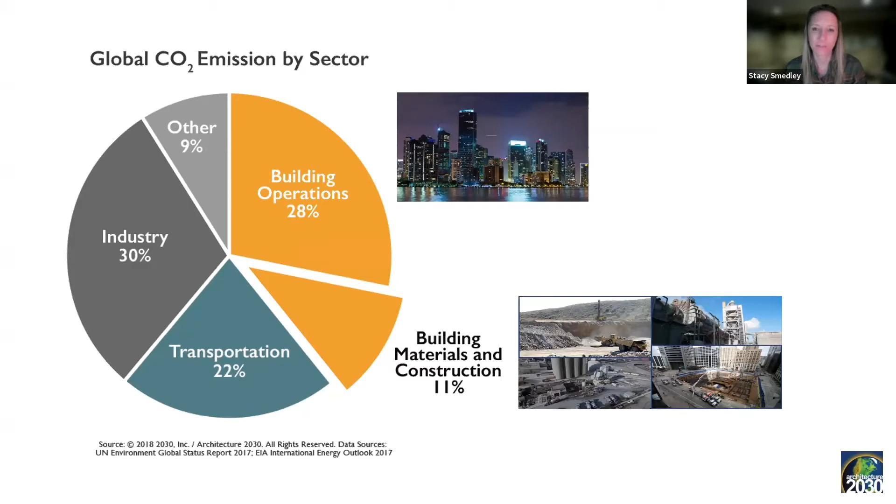And really, I think Margie touched on this, but where this all began for the tool and for Phil and I both is that we are now aware, as an industry, that buildings are a huge portion of carbon emissions when it comes to what we need to look at and reduce to meet our climate targets and reverse climate change. So almost 40% of it, as mentioned. The part that we're talking about today, which has an urgency around it because we haven't been talking about it for that long, is this building materials and construction component, where we're actually thinking about the manufacturing emissions of how we make all the things that we build with.

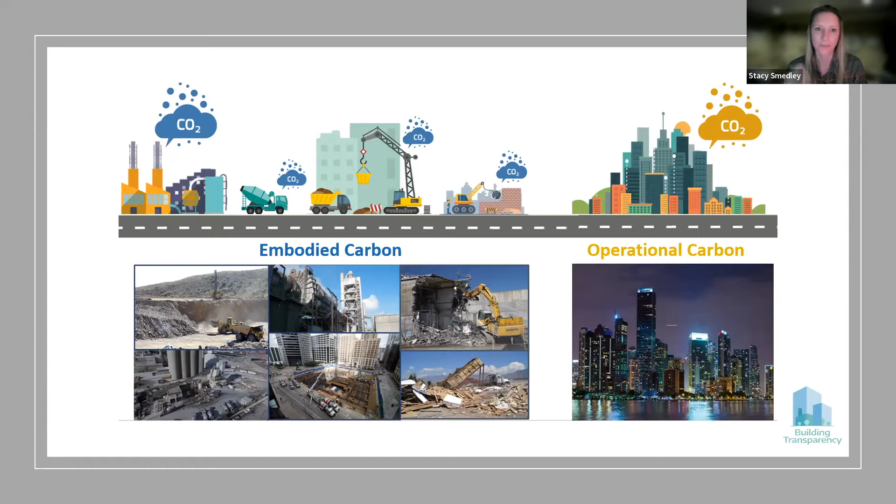So there's a lot to it. It's complex, and the goal of what we're doing at Building Transparency is really to try to help make it as simple as we can so we can take action. The other way I like to just frame this in people's minds is when you think about these emissions of building materials and that embodied carbon bucket, it's a lot to do with the manufacturing of all these things that we build with.

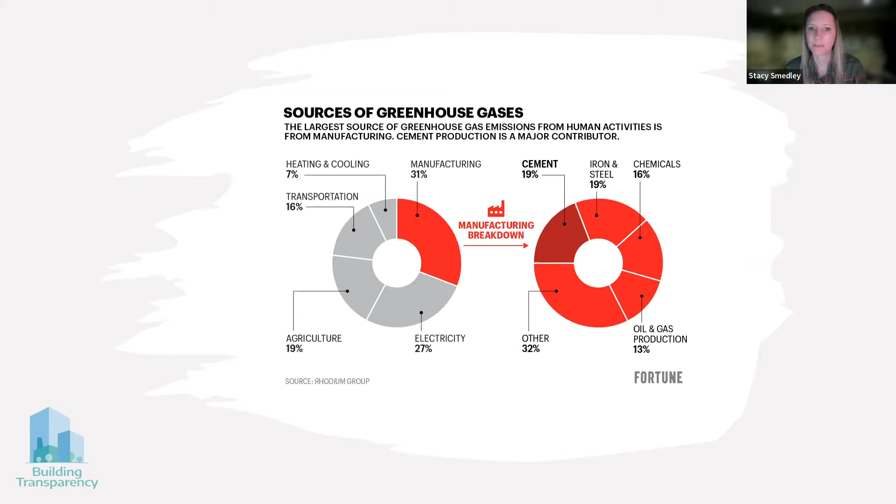And if you look at the manufacturing breakdown of global greenhouse gas emissions, you can start to see that the major building materials, things like concretes, steel, and even getting into things like paints and everything, you can see how much of the manufacturing emissions could be tied to those materials that we're building with. So whatever way you look at it, it is something that needs to be addressed if we're going to mitigate climate change and get to zero carbon emissions.

The other thing is we know that we're building a lot. And if we're building a lot, we are emitting a lot in the making of the materials that we're putting into those buildings. If it's over 2 trillion square feet in the next 35 years, think about all of the concrete and steel and gypsum board and other things that we're actually manufacturing to fill those buildings with and build those buildings out of.

And what we now know based on a lot of different entities, including Architecture 2030, is that those embodied carbon emissions, again, the things that we're making the buildings out of, once those emissions are spent at time of manufacture and installation, they are in the atmosphere. And so when you look at average global buildings, you think about operational carbon starting to take off once the building's operational over time. Even if you take that 2050 line in the sand, it's about 50-50 on average in terms of the embodied and operational emissions.

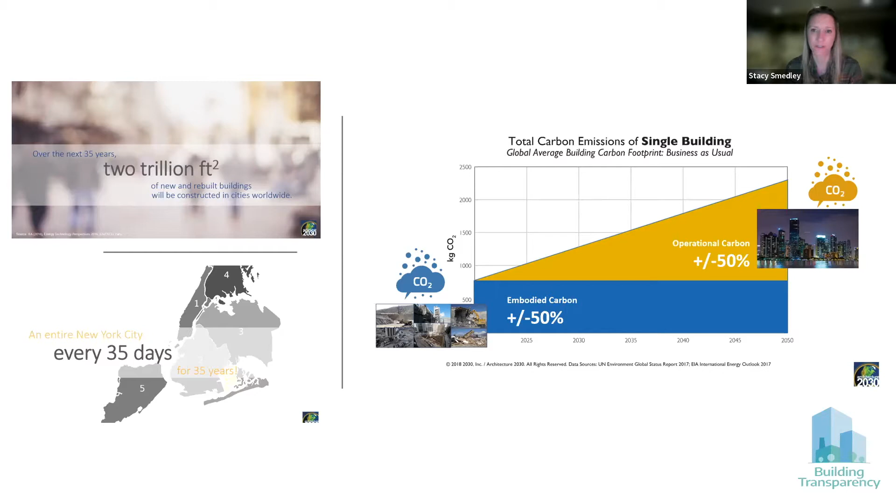And that means that 50%, we can't go retrofit the building and take those emissions back out of the atmosphere. So we have to reduce them at the time of specification and procurement and manufacture if we're going to reduce them. We have reached a kind of tipping point around all of this, and there's a couple of reasons for that tipping point in my mind.

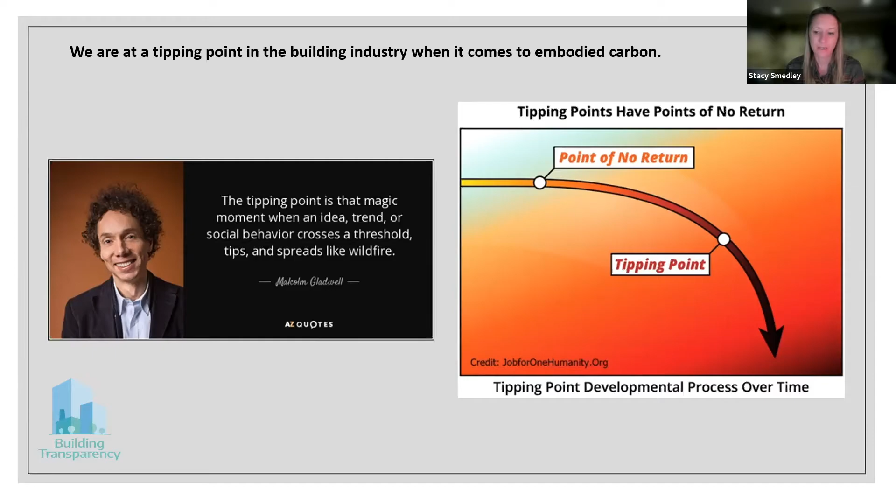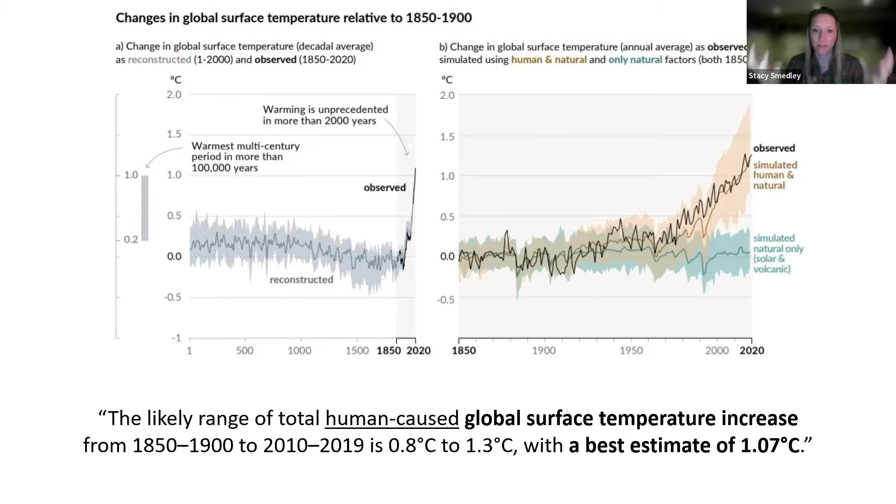The first is really just what we now know about climate change and the way that climate impacts are being felt. Of course, this all really started with the Paris Agreement and wanting to make sure that we were staying below a certain temperature increase. Well, then last year, the IPCC came out with their new report and really showed us that it's worse than we thought. So the likely range of total global surface temperature increase between 1900 and 2019 was a best estimate of 1 degree Celsius already. So we're outperforming our temperature increase in terms of what was projected, which means that we have to reduce more quickly if we're going to mitigate that 2 degree Celsius rise.

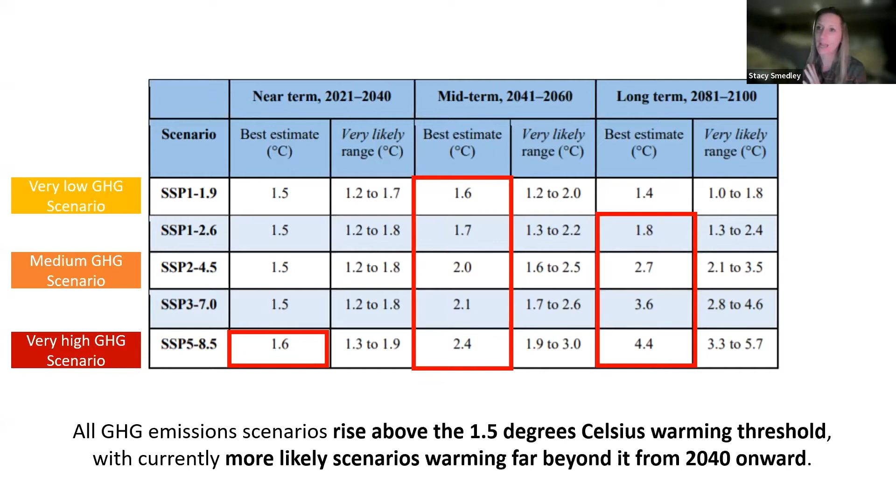Just one more kind of science nerdy slide, because the why is so important as to why we're so focused on this, Phil and I, is that if we look at the best estimates of where we're going based on current greenhouse gas scenarios, even a very low one, by 2040 to 2060, our best estimate is 1.6 degrees under a very low carbon emissions scenario, all the way up to 2.4 if we kind of keep on going business as usual. And I think many of us will still be alive when that's happening. So this is urgent. It's not years out anymore. And the work that we need to do has to be today, not in the future.

So it's becoming something that these large corporates are aware of and are committing to zero, but on a very short time frame. So they need the tools and the data to be able to actually meet those commitments and targets. There's also stuff happening at the policy level. I won't go deep into this.

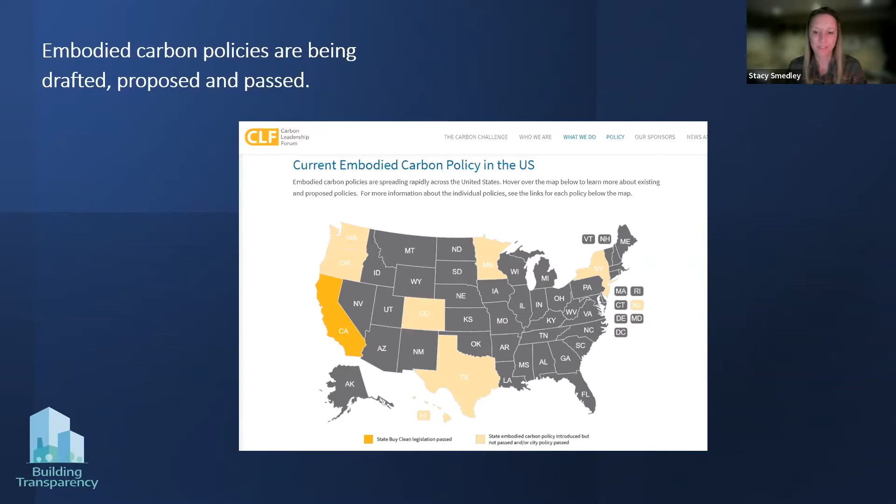You could go to the CLF, the Carbon Leadership Forum's website, to really see the landscape of policy, but there's policy now being talked about around this too. So we've got private sector and public sector all talking about this. They need the tools and data to actually implement these private and public policies.

So again, it's happening at various levels of policy, King County and Seattle, all the way up to the federal government and the Build Back Better Act and what was announced yesterday in an executive order around clean procurement and low embodied carbon materials. So there's a lot going on. There's also people like this guy writing books about it. So Bill Gates in his book talks about cement and steel quite passionately in terms of how we need to actually look at reducing the emissions and creating zero carbon concrete and steels in the future.

So with all that, this is really where Phil and I were, I think, together about 4 years ago now. It seems like it's been a decade, but it really wasn't very long ago when we were grappling with how we could actually help with all of this and figure out a way to provide those data points and a tool that could help do something about that.

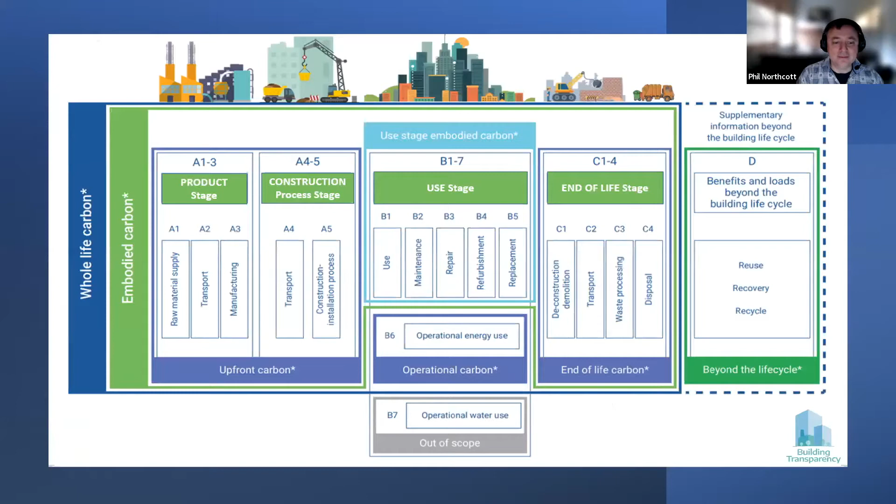Phil, do you want to jump in with anything while I'm talking? Or should I keep going? No, you're nailing it. Just keep going. Okay.

All right, keep going. So really, when we were trying to figure out where we could start with doing something about this, we started looking at the emissions of how we construct things. And these product stage emissions were really the stage where, again, it's decision making at time of specification and procurement. It's the largest piece of emissions when it comes to the manufacturing and installation of materials. So what we came up with, the EC3 tool, was really keenly focused on this product stage as a starting point, so we could make actionable reductions.

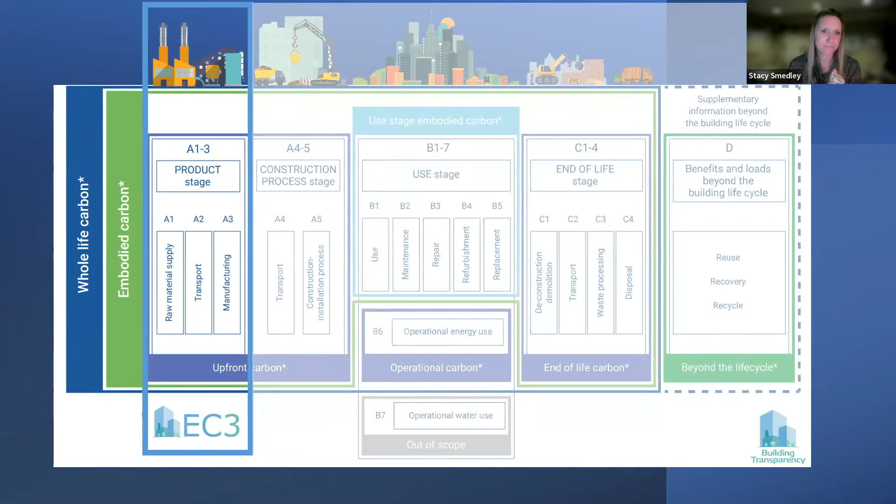So Phil and I got together at the Seattle office of Skanska. He was looking for a way, I think, to start his climate change software work, and had posted on a message board for the Carbon Leadership Forum. I was looking for someone to help me figure out how we could take data and make it actionable around embodied carbon and construction. We started noodling on that, and really this list of requirements for a tool started to develop. And so when we talk about EC3, it's important to remember that it's free to use.

It's open access in terms of the data that we're using and the way that it works. It's transparent in terms of the way we're looking at the data and what it's telling you. I would put easy in quotes because it is a complicated topic, but we try to make it as easy to use as possible, a lot through Phil's work with our users to really understand how it needs to work and look. And then it's industry-led and supply chain focused. So keep that in your minds when you're thinking about EC3.

The next part is we didn't want to be duplicative. So it's not trying to do something that another tool is doing. So there was a gap when it came to how we look at carbon emissions of materials, really at that product versus product specification and bidding stage. And that's really what EC3 is here to fill, is that gap where you're making that decision on the product you're procuring.

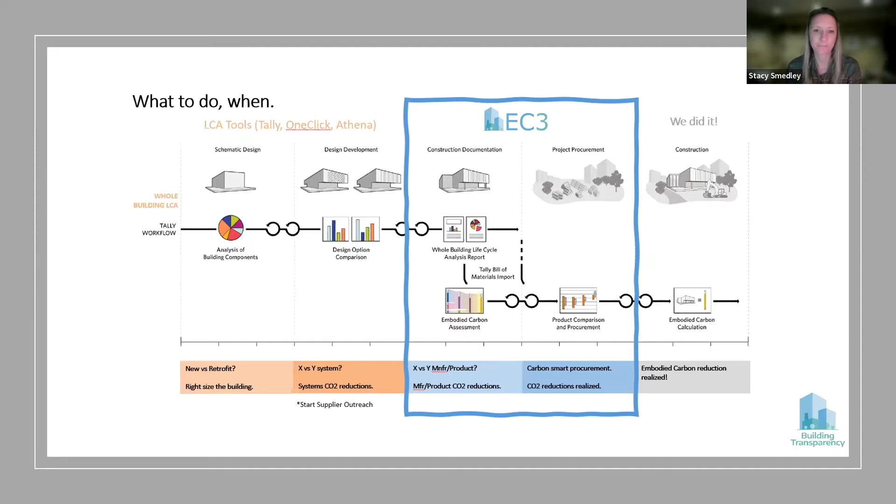The way we do that, just in 1 minute description, is through environmental product declarations. In my role at Skanska, I was looking for a way to get to a carbon intensity per unit of materials that's very similar to how we cost estimate, with a cost per unit of material. So you can really think of this almost as carbon estimating. And I found that in environmental product declarations, which are third-party verified documents that give us that carbon intensity per unit at the product or mix level, in this case for concrete. If you think about it, that's very similar to the nutrition label on a box of cereal, where you've got a carbohydrate per serving size.

So the goal was to get all of that data in these PDF documents, where EPDs were typically PDFs that you'd go find on a website, into a digital database that we could then search and sort and use to build project level carbon estimating.

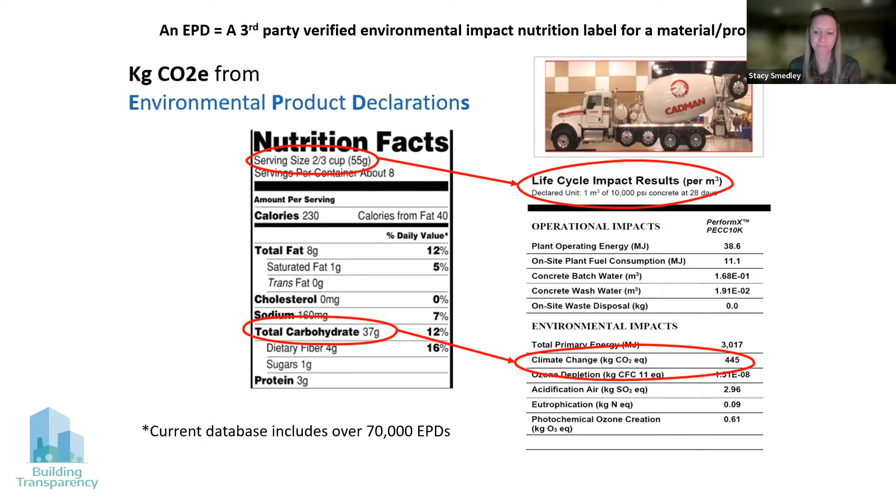I should mention that carbon engineering is a lot like cost engineering. You need to have an idea of where your carbon is in your building, where the biggest opportunities for reduction are, so you can focus your efforts on reducing there. And most of the disciplines that people know for reducing cost, or in fact for reducing faults or reducing safety problems, for example, are applicable to carbon. We recommend basically a Pareto process.

And what we're here to do is provide the tools to make that possible, so that you as builders, as building owners, and as professionals can really significantly reduce the amount of carbon that we're putting into the atmosphere within your existing workflows.

As the database grows, we have more data for that range to be kind of complete for a material category. And you can also use the find and compare materials function if you just want to go in and see what suppliers have EPDs for a particular material type in a particular location. Start to compare products that you know are equal in terms of what you could use for something like a roofing or a carpet or gypsum board, or three concrete suppliers that have mixes that are comparable.

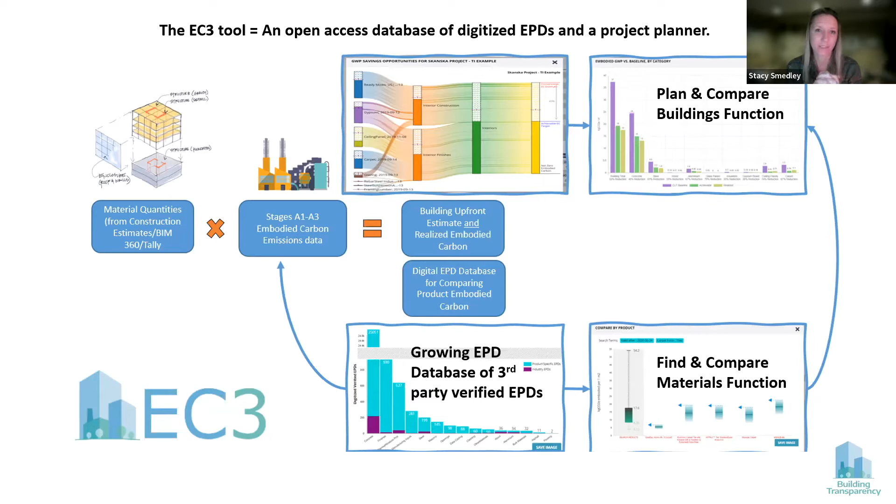Just a little bit more about the backstory. Again, Phil and I conceived the idea when we were sitting there in Seattle. We wanted to get to a proof of concept. Skanska seed funded that proof of concept through an innovation grant that I applied for, just to get things going. Microsoft came on board as a second seed funder. They were building a large campus and saw the ability of this tool to potentially help them, if it was successful, reduce embodied carbon emissions.

And once we actually got to that proof of concept, through their support and a couple others, we were able to then turn the project over to be incubated at the Carbon Leadership Forum at the University of Washington to really enable it to be an industry-led endeavor. And that means that all of these folks on the screen gave time, gave funding, gave expertise during an incubation period where Phil and I stayed involved in how the tool would look and operate. And of course, he developed it on the software side. But we engaged all of these folks to give us feedback with the Carbon Leadership Forum support on methodology and data. And the tool was launched in November of 2019 publicly at Greenbuild.

When that happened, we needed a place for the tool to go. So that's really where the Building Transparency story begins. Building Transparency was stood up as a nonprofit formally in January of 2020 to take on the continued maintenance and development and ownership of the EC3 tool, all around a nonprofit mission though. So it's very important that everything that we do as a nonprofit is to provide open access data and tools that are necessary to enable this embodied carbon reduction that we are talking about.

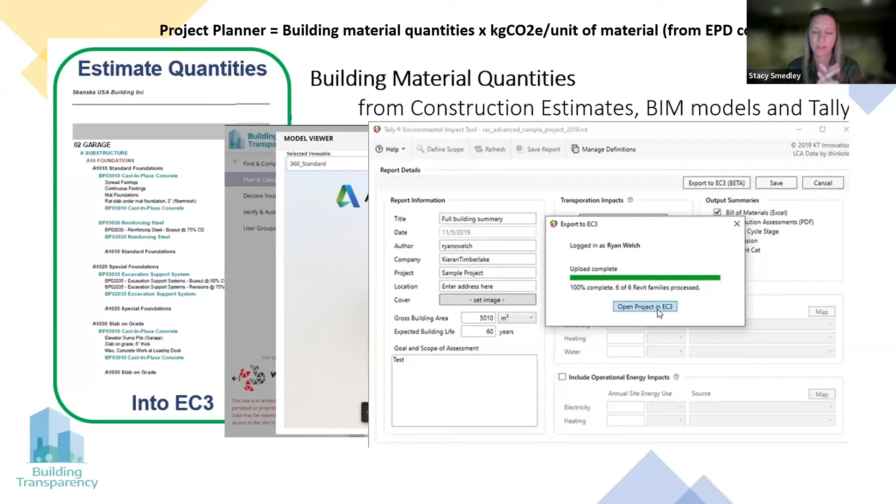But just briefly, the way the tool works, again, first, if you're building a project, you're going to get estimate quantities out of a number of different places. So if you're looking at this through the project lens, you would start with a construction estimate that might look like something on the left that you're going to input into the tool in terms of description and quantities. We have a BIM 360 import that you can do. We have a Revit plugin in beta that Phil's team is working on. And we also have this export from Tally. So multiple ways to get material quantities.

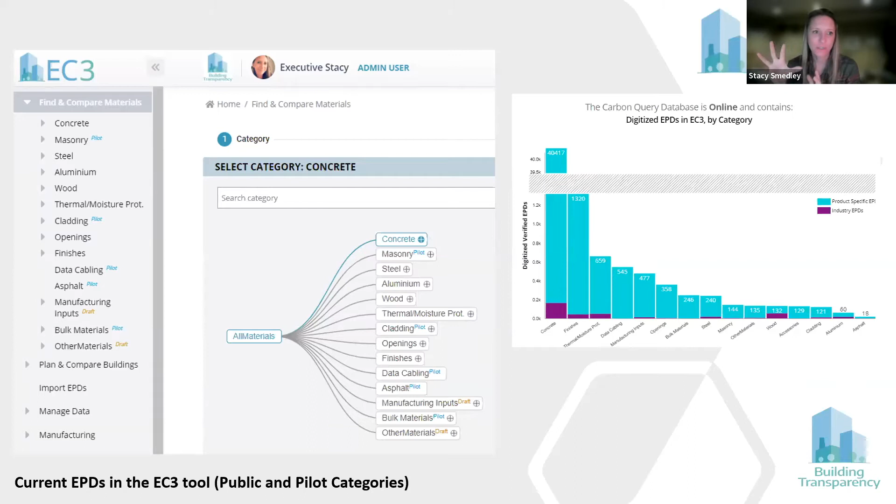To get to the actual data in the tool, there's a way to search and sort by material category and subcategory. So you can go into something like concretes and then ready mix and access the database. The current database holds over 80,000 EPDs. This is actually an old screenshot. I think we're at like 65 or 70,000 concrete EPDs now, for instance. Yep. So again, you can go in and actually see the database in real time, how much data we have per category, and then go in and start to search and sort that data based on what material you're looking for or interested in.

What that allows you to do when you get into each of the categories is start to filter down to a region or a place, filter down to manufacturers, and then do comparisons of their data. So I don't want to get too much into all the different nuances of descriptions of all these things, but really what this is showing you for this example is ready mix concrete in Washington State, are 3 suppliers that have EPDs, and then their ranges of carbon intensities for all of their mixes.

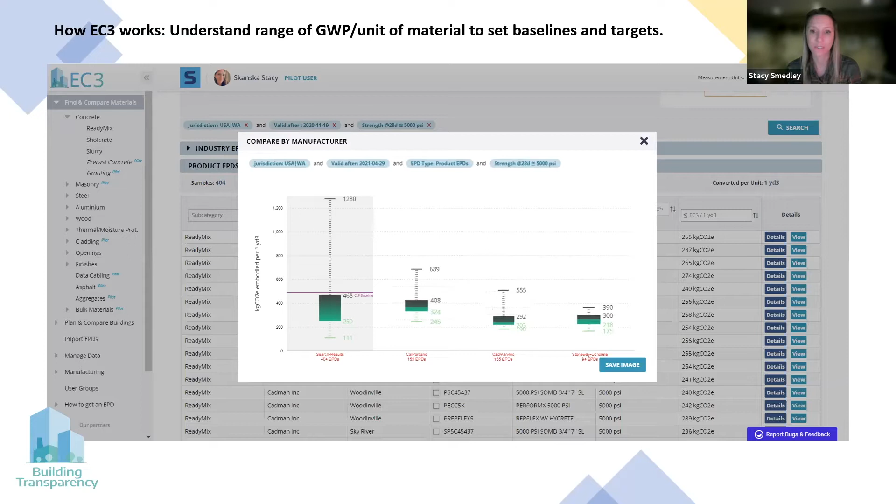So this is where really we get excited about being able to show and celebrate the manufacturers and suppliers that are currently the lower carbon producers, celebrate that they're being transparent by creating EPDs, and then really watch reductions happen over time when we start to look at the database and how emissions start to reduce when there's competition. So in Washington, we've got clients or partners like Microsoft and other tech companies, contractors like Skanska and Turner, all using the tool to request this information from these suppliers. You can see what just happened is over time, their carbon emissions are actually reducing for their whole collection of mixes because of how they're competing now on carbon and cost.

And one of the things that's remarkable about construction materials is that a lot of them are very carbon intensive. There's a lot of chemistry involved. There's a lot of energy involved as well. But one of the things that's really remarkable is that there are quite large savings in embodied carbon available with existing technologies. It's a metric we haven't been tracking. And with any metric that you're not tracking, you're wasting a lot. That's true of almost any quantity in industry.

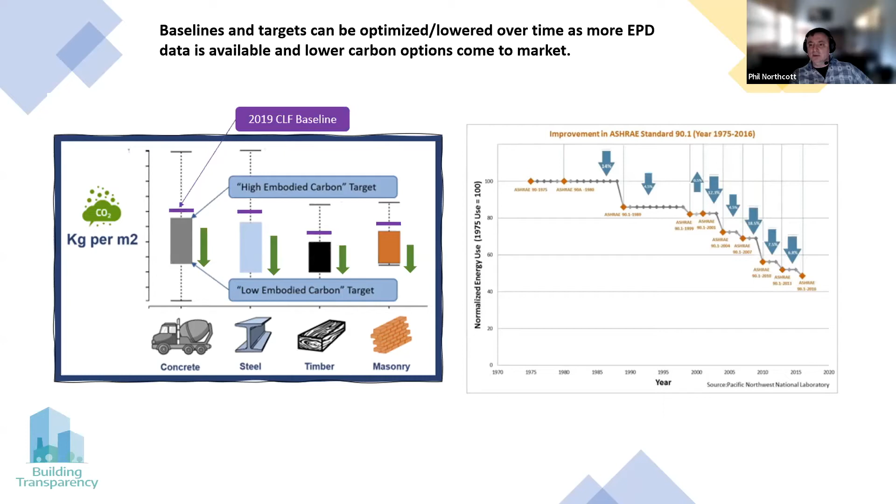And it's part of what motivated me to get involved specifically in construction materials, was realizing that the carbon reductions available in construction materials are some of the cheapest reductions in carbon worldwide that you'll ever find. We in this industry now have a real opportunity to make an impact at very low cost.

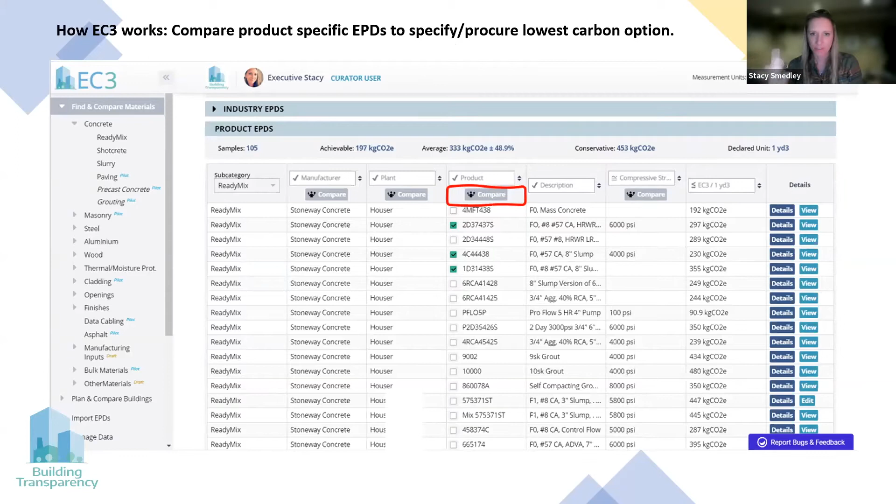So the next step really is how the tool can allow you to compare at even the product or mix level. So this is just an example. If you knew that you had 3 mixes that were comparable, either from the same supplier or from 3 different ones, you can start to actually look at those next to each other and understand that, you know, if I could pick any of these 3, why would I not pick that lower carbon option as my selection?

And again, this gets to Phil's point that this is the first low-hanging fruit section of these emissions reductions: these current products that are comparable that we just haven't been looking at the data point of carbon on for the industry. So there are these opportunities where we're not seeing any cost increase to get to a lower carbon option, and that incentivizes the others to reduce, and it's just this ongoing cycle.

I think it's kind of like operational energy when we figured out we could turn the light bulbs off at night and save a whole bunch of energy at nighttime or when we're not in our buildings. And that was a huge kind of aha moment, just to unplug things and turn the lights off. We have that same opportunity, I think, with embodied carbon at a pretty big percentage reduction. It's not, you know, 2 to 3%, it's 10 to 20 to 30 to 40 to 50, just by having the data available to us.

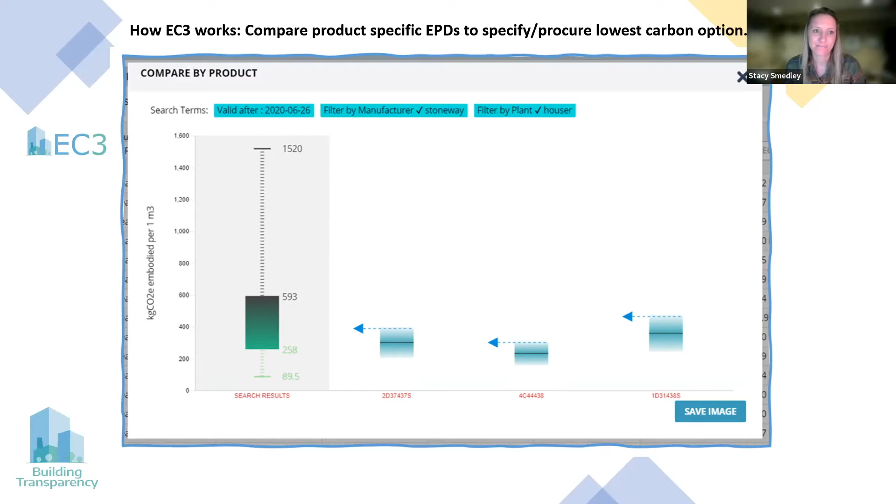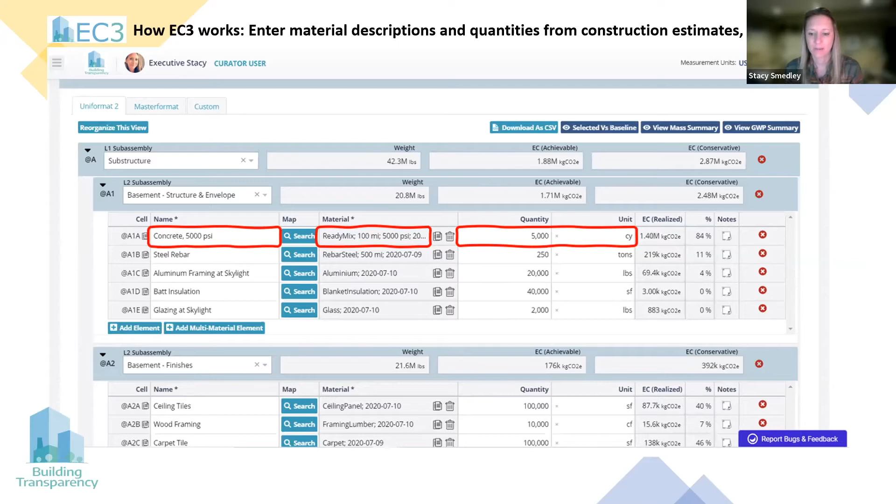This is a very simple project that's just got, you know, one material entry for each thing, but you're seeing here that ready mix in terms of emissions is a much bigger chunk than, in this case, carpet or blanket insulation. This is an underground lair for my son's dog, Chuck.

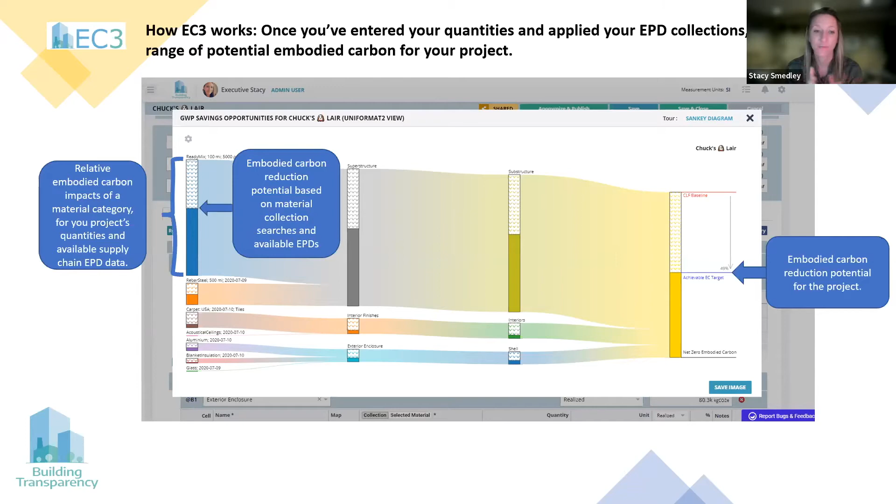As you go to the right, it's going to roll it all the way up to an actual reduction potential for the project. And that's really going to tell you, okay, if I am smart about my procurement, I look at the lower carbon options currently available in the EC3 tool for each product category, I could achieve this percent of reduction for my project.

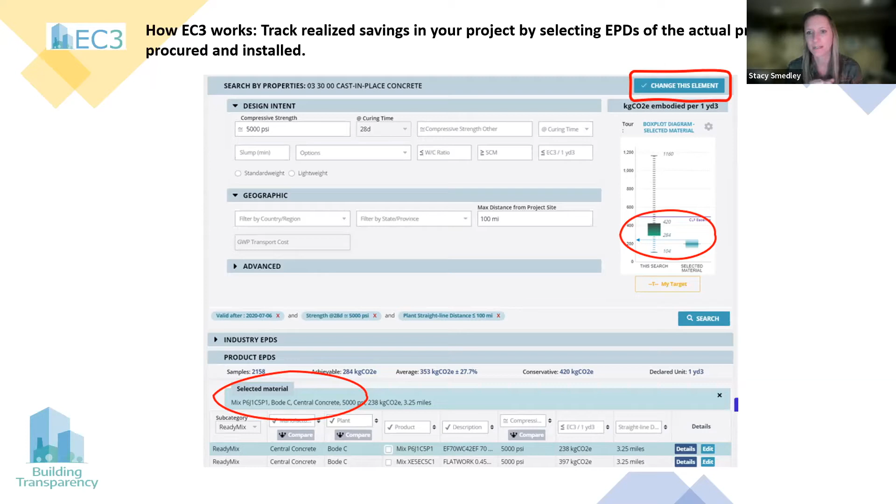The next step that the tool enables is really that realized accounting. So now you know the range of what's possible. If you wanted to dig into concretes, you could go in, and what you're seeing on this slide is that I've actually selected a mix. So I'm saying that I know that this is the actual mix that I procured for that concrete in that project. And it's going to show me how it's comparing to the range. So this is obviously a very good low carbon mix in that little box plot graphic that you're seeing on the right. And you can apply that to your project.

If you go back to the Sankey diagram, what you're seeing now is a little R, a realized line that's appearing all the way through for each product category, all the way over to the building on the right. And that's showing you how you actually did in your procurement of getting realized emission savings based on the actual products you procured for that project. So again, a way to benchmark and set requirements and really decide where you're going to focus all the way through getting to a realized carbon accounting for your project at time of procurement and construction.

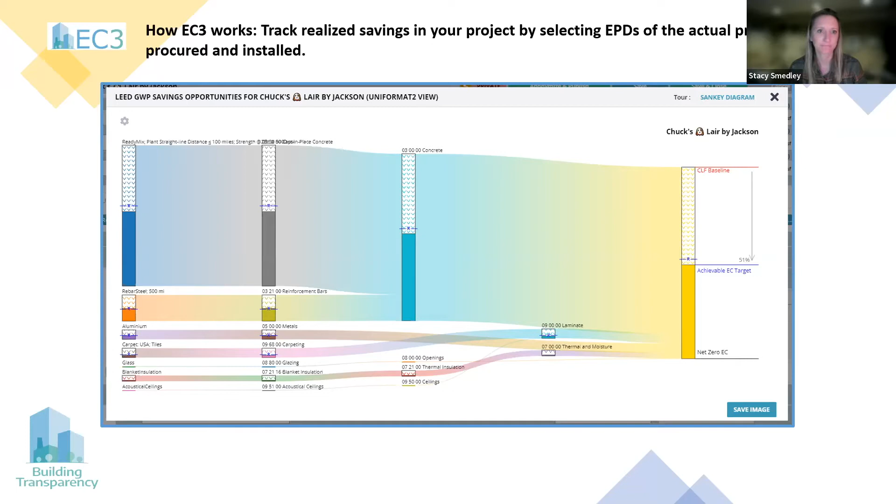So really what we're seeing right now with EC3 is that we've got, I have 2 more slides, so I'm not quite stopping. We've got the ability to do these things today, and this is really what both private and public policies are asking us for.

So require EPDs, search our database to find low carbon options, set targets or limits for the materials you're going to procure, and then require that this data is included during procurement so that you can get to that realized carbon content for your project. Just the exciting part bits, I guess I will stop.

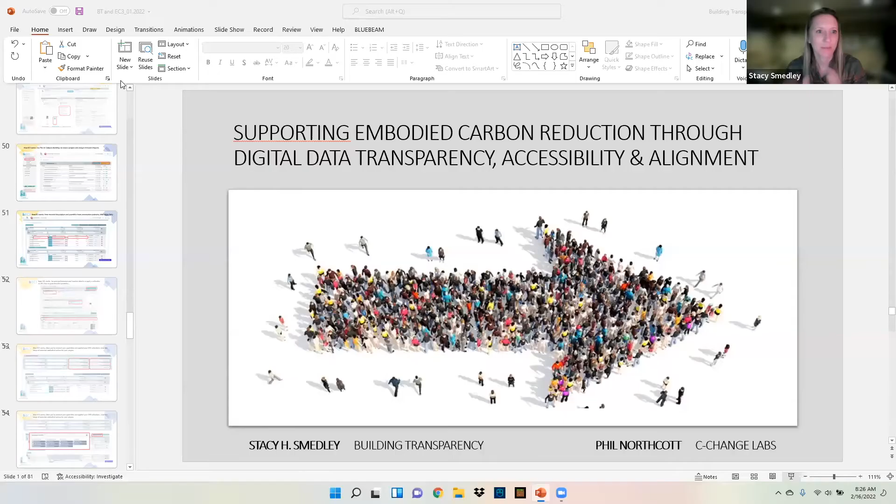I was going to share about the kind of current use of the tool, but I think I hid those slides. We're currently at around 20,000 registered users of EC3 in over 70 countries. We started in North America with about 1,000 people on the wait list, and now it's expanded to this growing number.

It's the curve I don't want to flatten. It keeps on going up in terms of folks that are engaging with the tool. I think that's just another reflection of the tipping point that we're at, where this is becoming something that people are really wanting to engage with and understand.

Great. Phil, did you have anything you wanted to add now, or should I start pummeling you with questions? I'll just do my brief spiel.

One of the key things about our industry is that it's a big, complicated industry, but ultimately, the thing that's going to make the biggest difference is if people who are buying buildings hold our profession and the entire supply chain to account for embodied carbon.

We all know that if something has a business case, if the client asks for it, it gets done and it gets attention. And there is an absolutely irreplaceable role that building owners can have in asking their professionals and supply chain to declare the embodied carbon, the carbon they are spending in order to build the building, and make sure that we're doing that in an efficient way and we're not wasting.